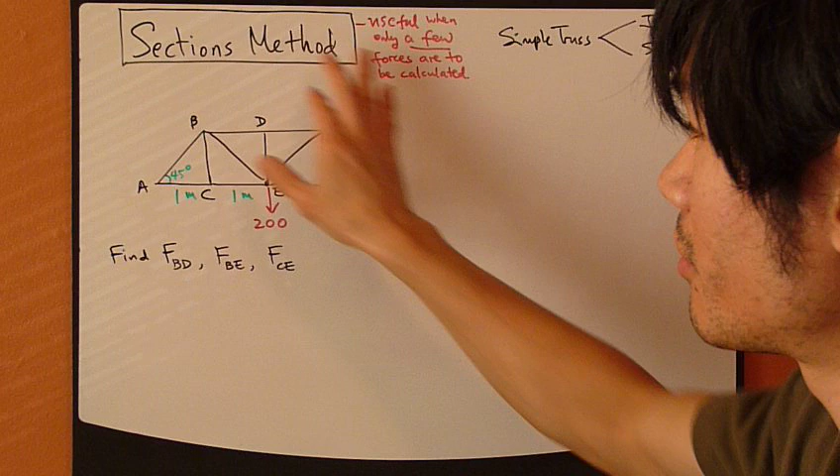But in this example right here, you're asked to find just these three forces: F in BD, BE, and CE. Just three, I don't really care about the rest. So in this case, the section method might be a little faster. The joint method, of course, will still work, but this method might speed things up a little bit. Let's see how this works.

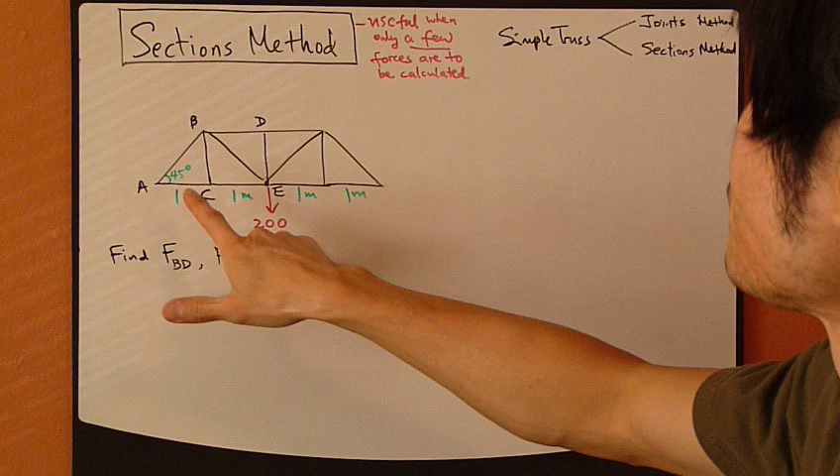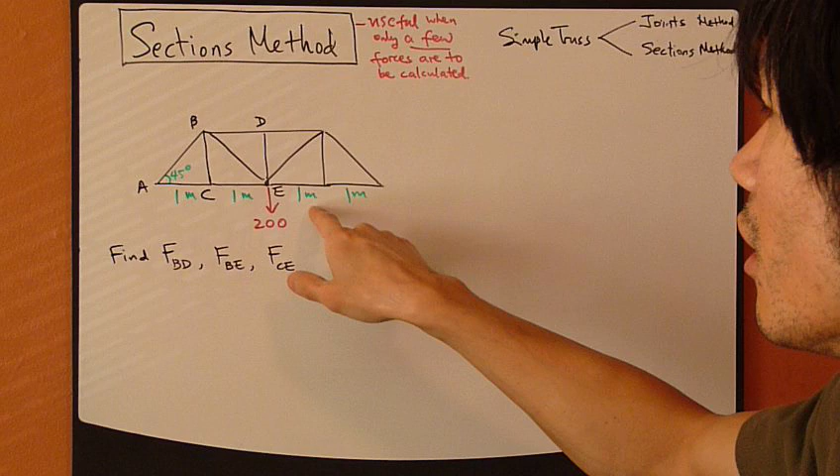Now, this should look quite familiar - same as the last video, exact same truss. Now, I have a concentrated load of 200 newtons coming down from joint E. Each section, across the bottom chord as well as the top, is 1 meter long, and the slanted members are at 45 degrees.

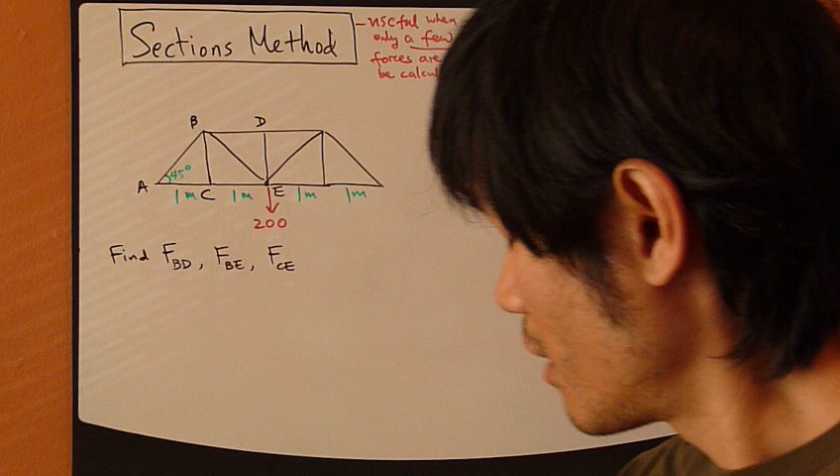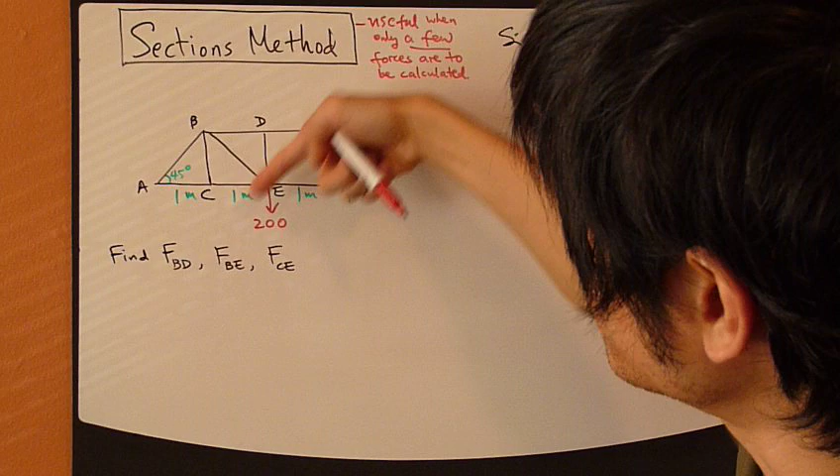Here, you're asked to find only these three forces. Now you recognize that these three members, BD, BE, and CE, kind of line up - BD is here, BE is here, and CE is here - kind of in this box right here. So for the sections method, what you do is make a line that cuts through the middle of your bridge, that sections through all the unknown forces, through the members where you need to calculate the forces. So in this case, it's these three.

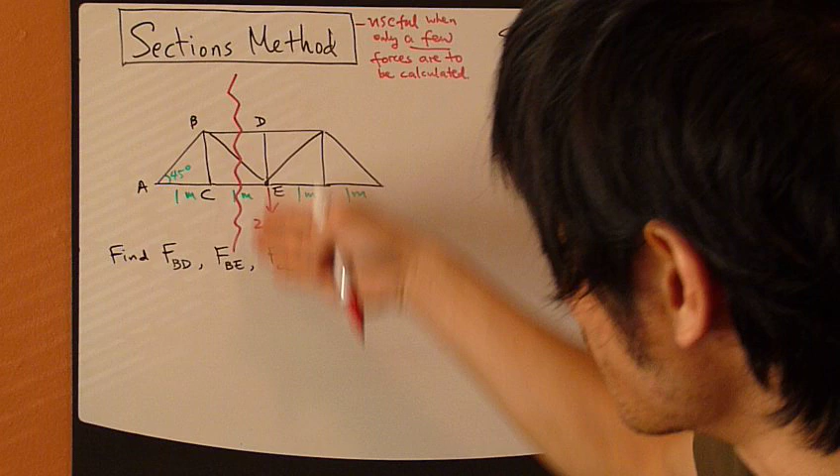So I'm going to do a cut, something like this. So I've sectioned through this truss, and now I have this left half and right half.

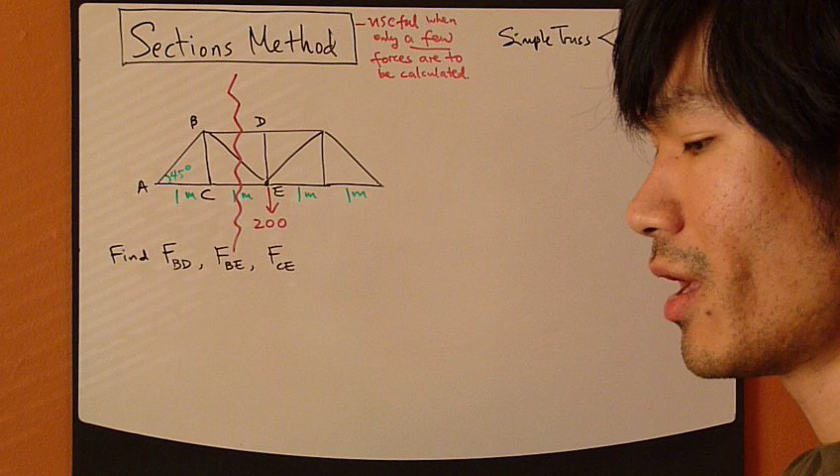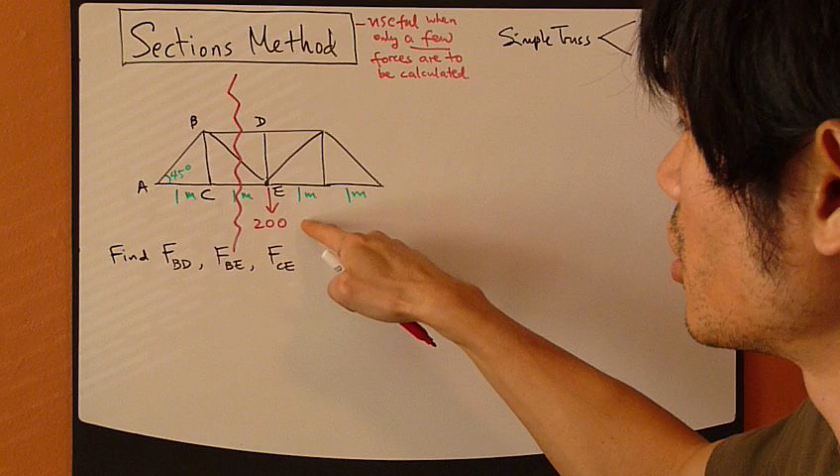So next, what you do is take the half that typically is smaller, and also the half that has some known force or forces. In this case, let's say I have 200 newtons here coming down the middle, but that's not the only known force. This truss is symmetrical, which means that immediately you know these two reaction forces, 100 newtons coming back up at joint A and then at this other joint.

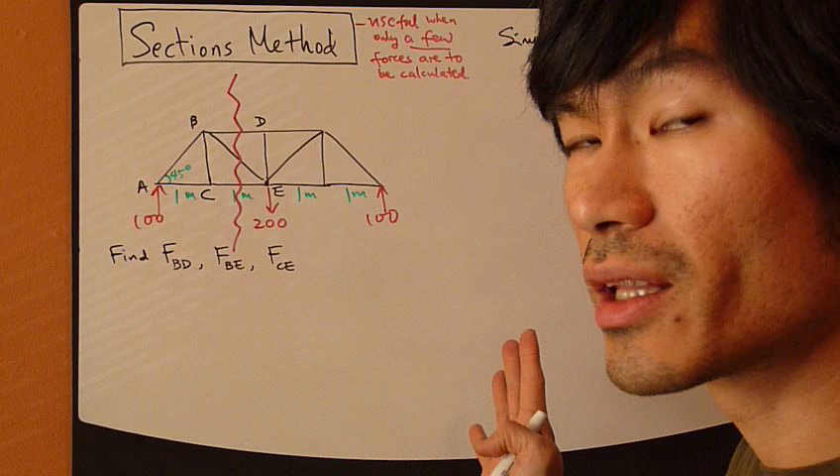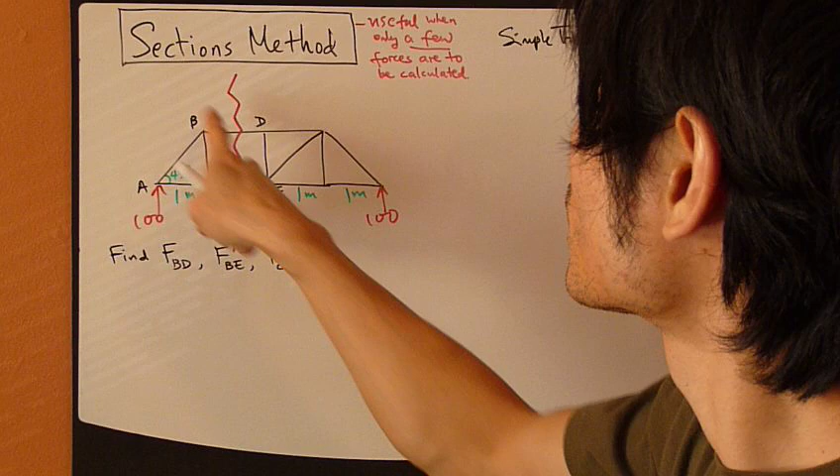So in this case, whichever half should work, but just to make things easier, I'm going to pick this left half because it's just a little smaller. So the next thing you do is draw that half, that part of the section you have just chosen, and throw away the other half. So just focus on this left section right here. I'm going to draw that.

So A, B, C, and then a little bit of BD, a little bit of BE, and a little bit of CE, because I've just sectioned through. So this is now my free body diagram - the structure that I'm going to analyze. And the unknowns, these three guys, are in here: this is F BD, this is F BE, this is F CE.

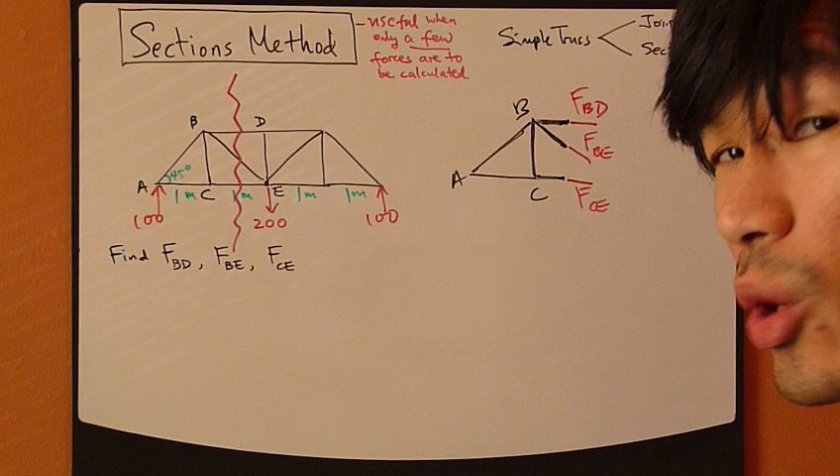What about directions? Well, at this point we don't know the direction - we really can't figure it out real quick anyway. So once again, if you don't know something, assume something, and you'll be okay. Trust me, you'll be okay. So assume a direction. Let's say I'm going to assume it like this goes this way, and this goes up, and then this goes to the right again. I'm just going to assume direction.

So these three are the unknowns, and I have this guy right here - this is 100, I do know that. And that's it. This is your free body diagram for this whole structure. So this whole free body diagram has three unknowns, one known, and that's it.

The other forces, let's say FAB, FAC, and FBC, they don't appear in this free body diagram because those forces have now become internal forces - internal to this structure, to this free body diagram now. That's why I don't care about them, because they're internal.

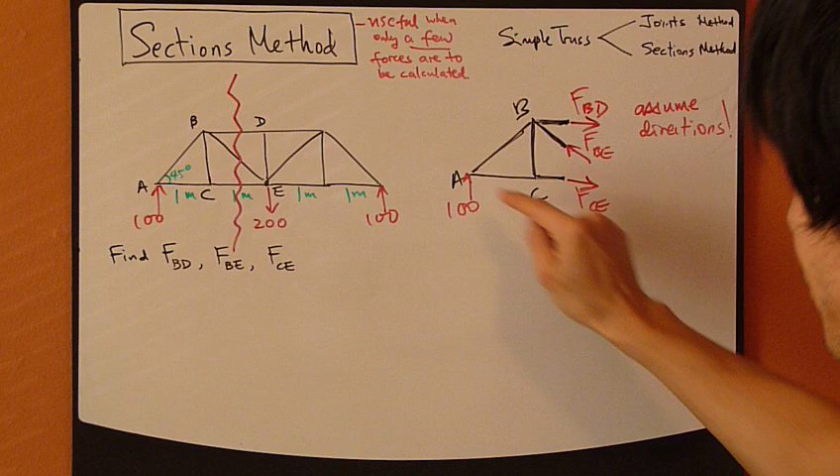On the contrary, FBD, FBE, and FCE, and this 100 Newton, they are external forces. That's why this free body diagram will work, because it involves the three unknowns.

Let's focus on one force at a time, using the same section, the exact same section. Except I'm going to draw that 3 times, 3 exact same sections, and I'm going to calculate these 3 forces separately. Now, before I begin...

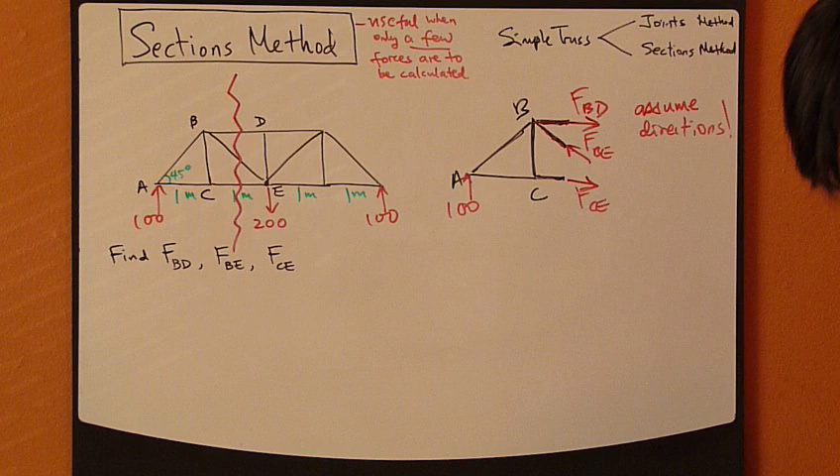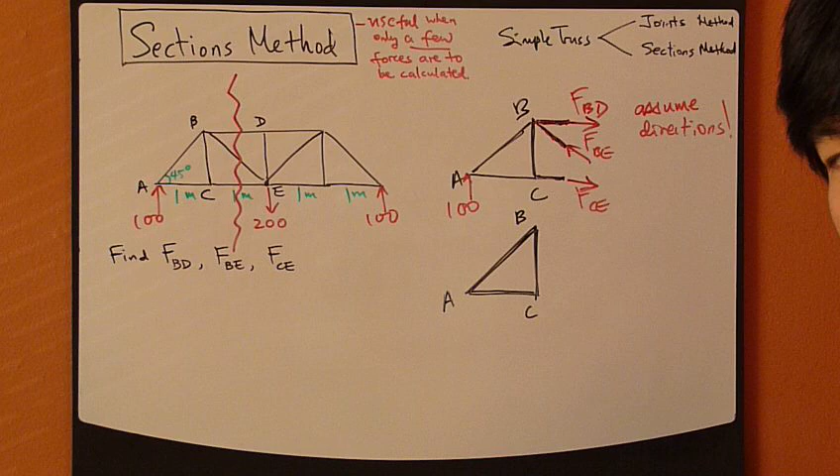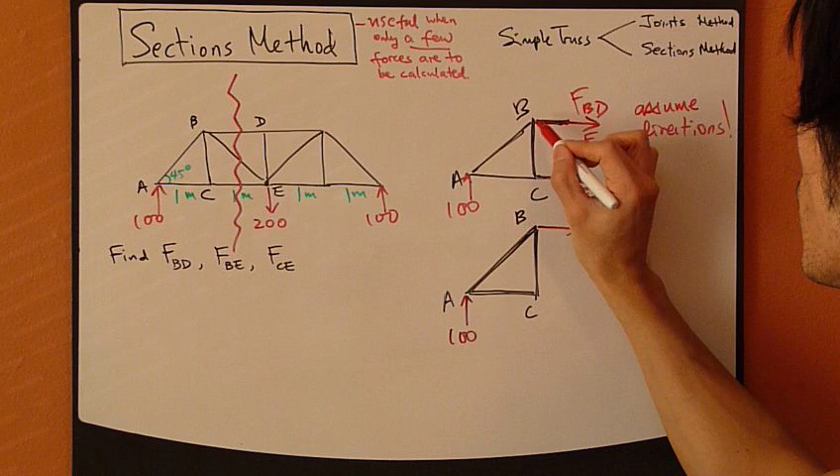Just notice that this FBD, FBE, and FCE actually extends through here, through this little leftover section, because they're all force vectors. So this picture right here is equivalent to looking at only this little triangle, that's it. You can essentially throw away these 3 little leftover pieces of the members, and then you draw all the forces. This is known, and these 3 you can just draw from here, because they are forces. This FBD actually begins from this joint B, right? So they're exactly the same thing.

So do this the same way for FBE and FCE. Now this free body diagram is a little easier to visualize than this. Just throw away the leftovers, and I think just keep it clean.

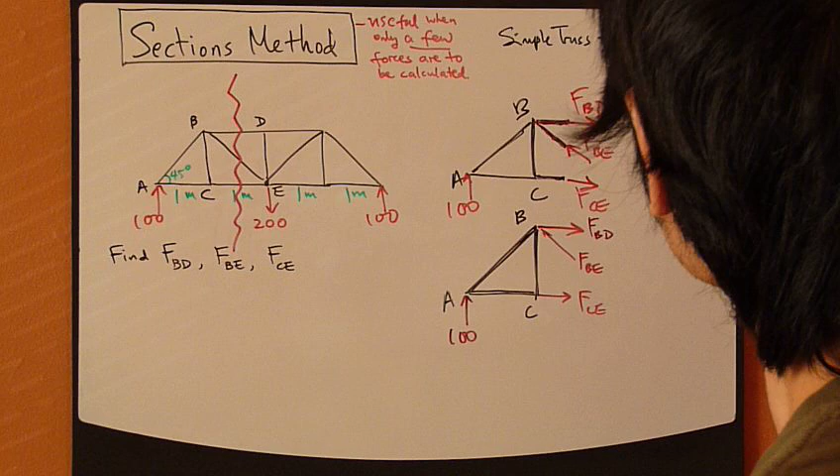All right, so let's look at this. Let's throw away this guy now. We don't need this. I don't need this either. Okay, I'm just going to redraw everything.

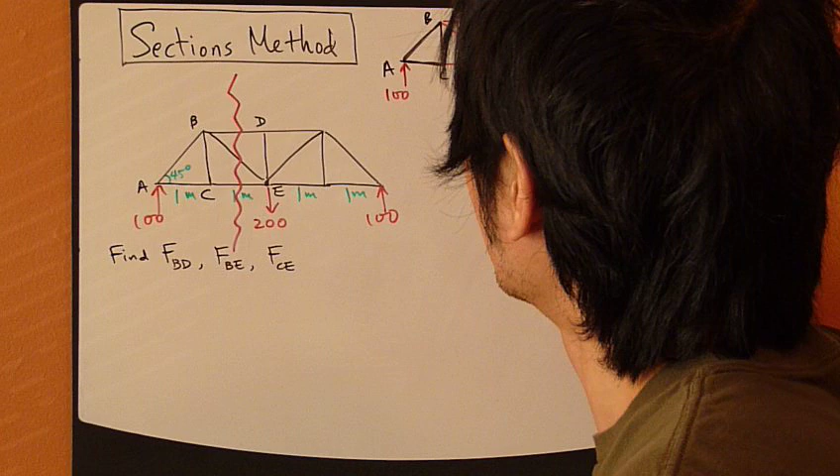So let's just keep one triangle, this ABC triangle, as my free body diagram up here, as a reference. I know that this is 100, goes up for sure. These 3 guys, again, I'm going to call it FBD, FBE, FCE. I'm going to keep this as the actual picture, where the actual direction will be drawn as soon as I've figured out the actual direction. So keep that there as a reference.

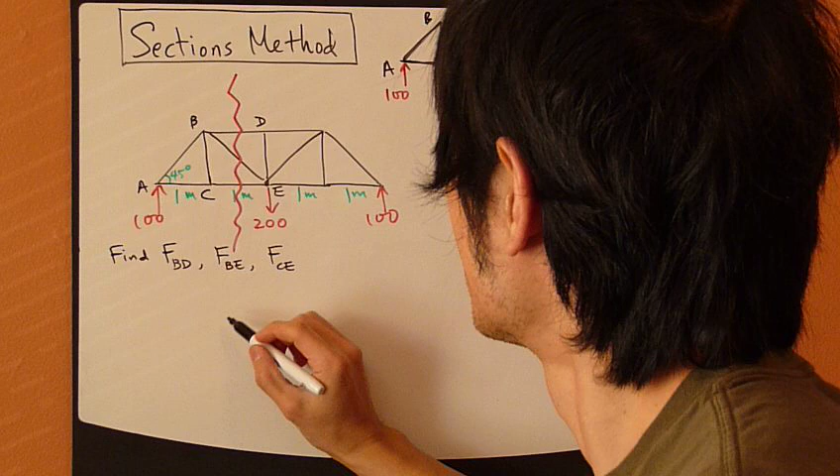Now, let's begin. The first force. Well, just draw the first diagram, and draw it here. Fine. Again, ABC, 100. Now here I can draw my assumed direction: FBD, FBE, and FCE. Pick any force you like to begin with.

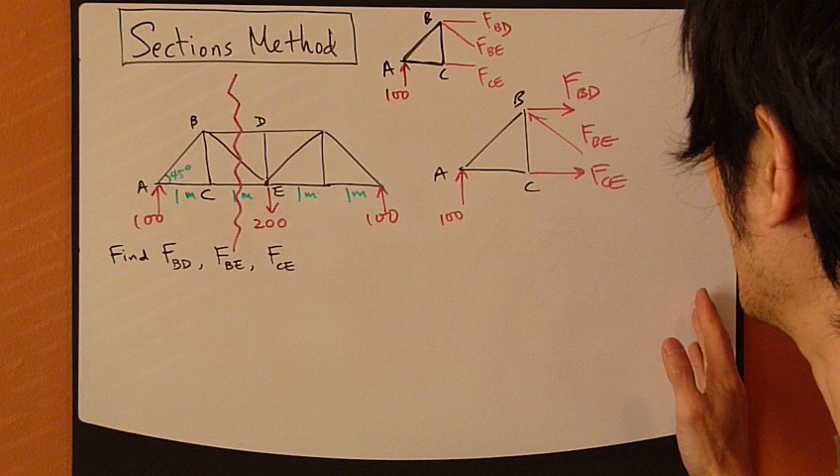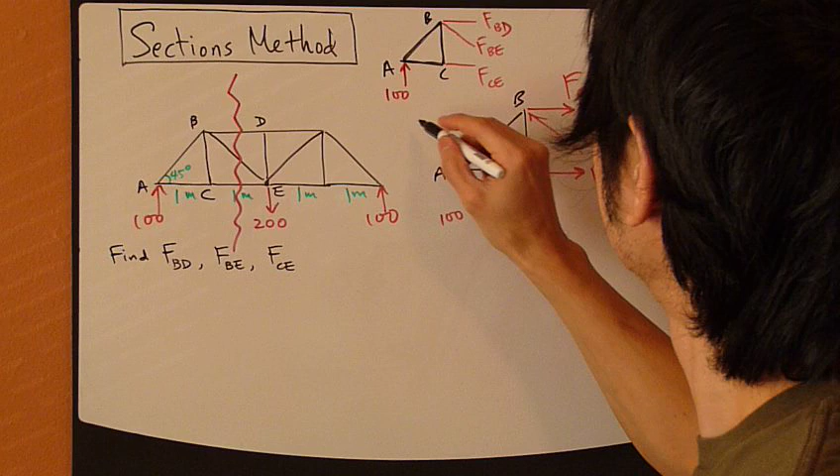Let's say I'm going to first calculate... let's pick the easiest one first. So I can do FCE. Okay, so let's do FCE. This is my free body diagram. I have 4 forces total, 3 of them unknown. But how do I eliminate the other 2 so that I can find this FCE?

Now at this point you might be thinking, okay, what I told you before: in the joints method, you pick a joint with no more than 2 unknowns. That's because we only have 2 equations to work with, right? Sum of forces x equals 0, sum of forces y equals 0. So 2 equations, 2 unknowns. Mathematically, you have to satisfy the requirement. But here, what's going on? We have 3 unknowns. Well, the answer is we don't use these 2 equations at all.

We don't have to. Instead, recall equilibrium conditions for a rigid body: other than satisfying these 2 equations, we also have to satisfy the sum of moment equation. So now in the section method, this is the equation that you'll be using over and over and over.

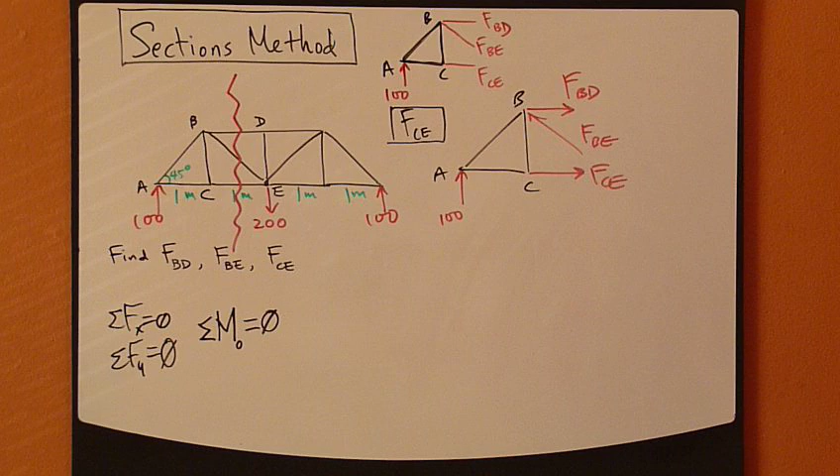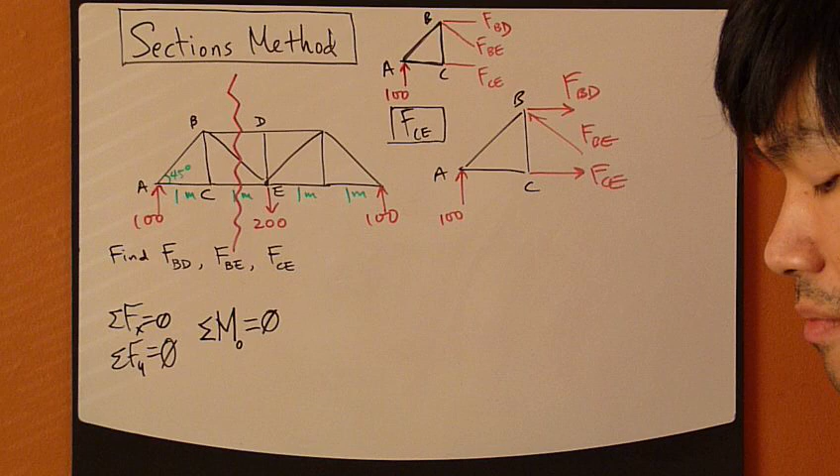Here's the trick: you pick a point where a lot of forces pass through. In that case, those forces will create no moment, it will be 0 from those forces because they pass through that point. In this case, look at this. I have these 2 forces, FBD and FBE, both passing through this joint B. So maybe I can sum the moment about joint B.

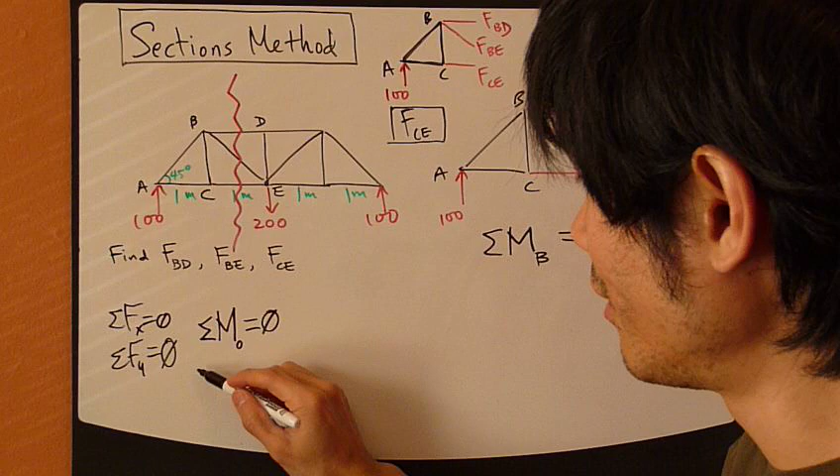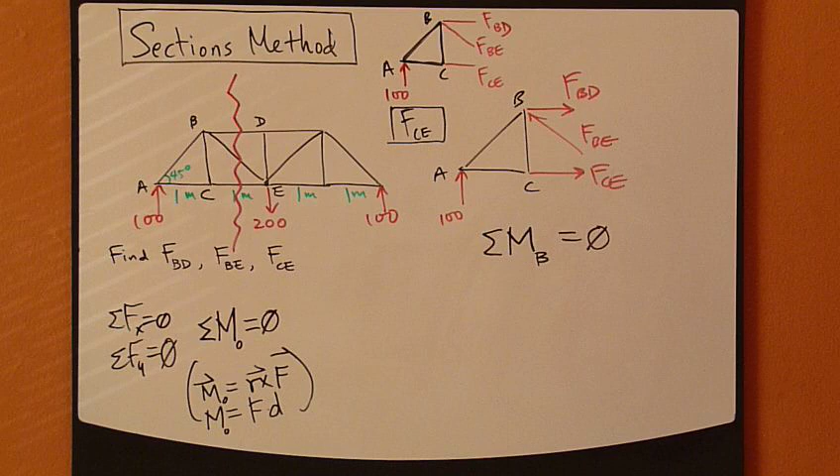Because recall, moment equals R cross F, and the magnitude of moment equals force times this R, in terms of magnitude would be D, the shortest distance between the line of action of the force and the point, whatever point that you choose. So let's apply this equation to this entire free body diagram and see what happens here.